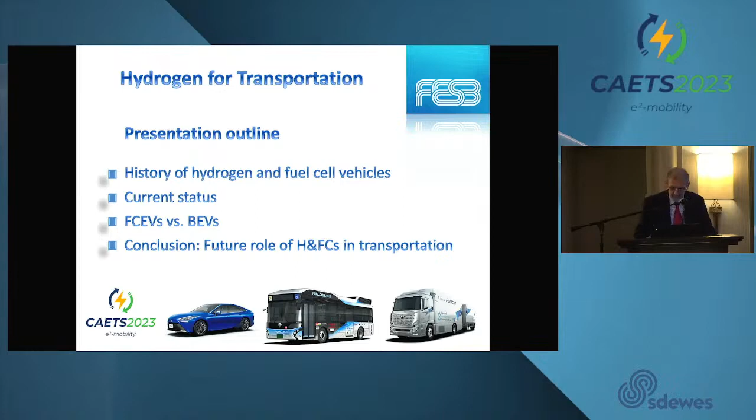I think it's very much clear that a hydrogen car is also an electric car. It has an electric motor, but the energy is stored in the form of hydrogen instead of batteries. But I should also mention that every fuel cell car actually also has batteries, so it's kind of a hybrid car as well.

We can also have hydrogen in internal combustion engines, but I think that's already passé, although recently there are some advancements in internal combustion engines. But the efficiency of fuel cell systems is higher than the efficiency of internal combustion engines. And efficiency should not be compared at maximum power, it should be compared at average power. There, the efficiency is about twice as much in fuel cell vehicles as in internal combustion engines.

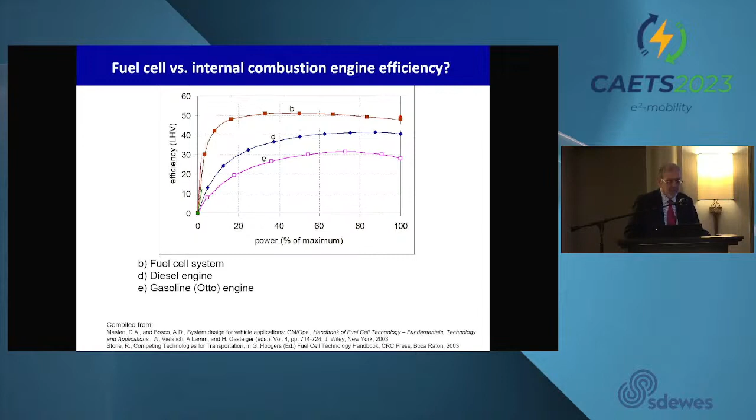So most of the recent developments are in fuel cell electric vehicles. Now going back to history, the first hydrogen car was developed in 1807, in France. This vehicle used the first internal combustion engine that used hydrogen as a fuel, and hydrogen was stored in a balloon. This vehicle is now in a museum.

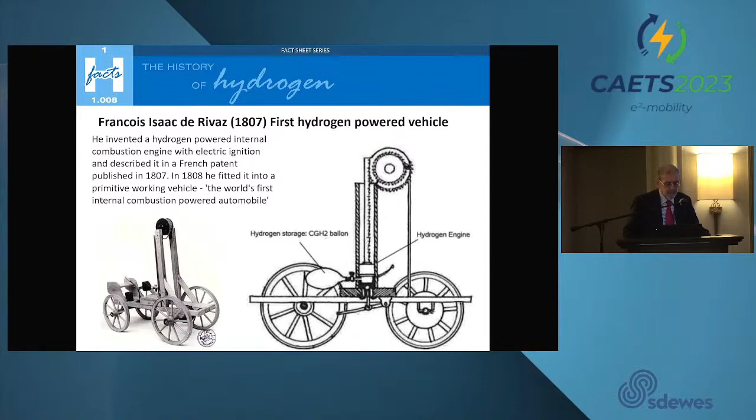And then a few decades later, fuel cells were invented. Actually, the Swiss-German scientist Christian Schönbein is the first one who realized the fuel cell effect, and he was in communication with Sir William Grove as well as with Faraday. Those letters are saved, and they prove that Schönbein is actually the one who first observed the effect of fuel cells, but Grove was the one who first made a working fuel cell and applied for a patent.

Then again, several decades later, we have a remarkable prophecy by Jules Verne, who made many predictions, and many of those predictions came true. This one, about hydrogen being a fuel of the future, or as he said, water being a fuel of the future with its constituents, hydrogen and oxygen, is also coming true.

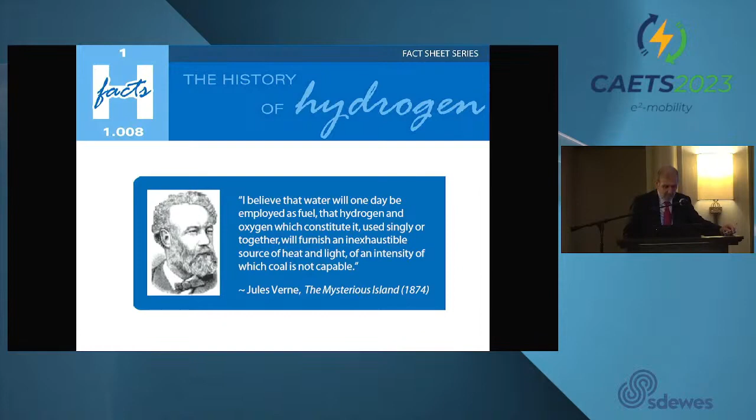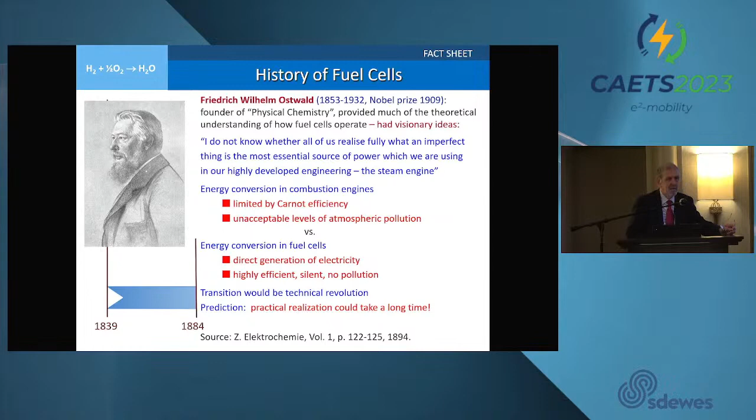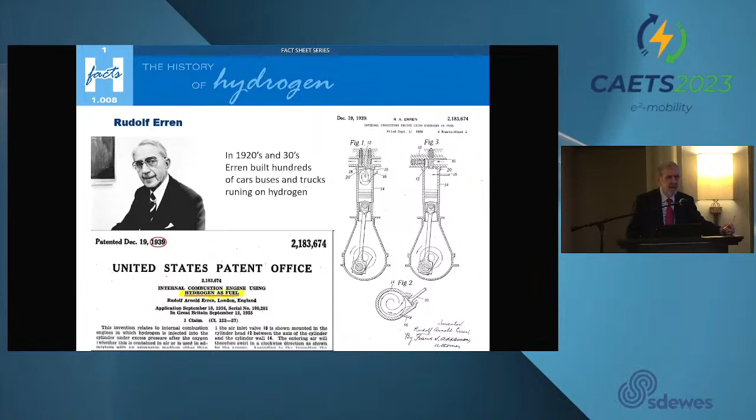Between the two World Wars, there was a lot of development of hydrogen vehicles by a German engineer, Rudolf Erren, who worked both in Germany and the UK, and also held some patents in the United States. He made hundreds of buses and trucks running on hydrogen using internal combustion engines.

Then in 1933, Norsk Hydro power company converted one of their small trucks to use a hydrogen engine, but the hydrogen was not stored on board. Instead, ammonia was stored on board, and there was a small ammonia cracker on board the vehicle.

About 100 years after fuel cells were discovered, we had the first practical fuel cell. It was by Francis Bacon in the UK, just before the Second World War. After the war, this technology was obtained by a US company and used in a space program. But this was the first fuel cell system.

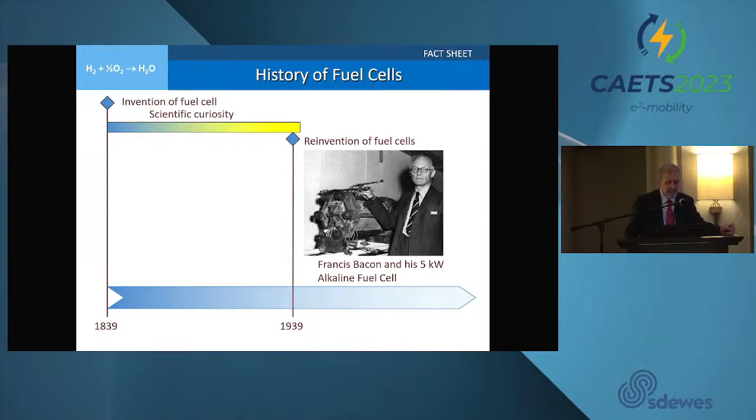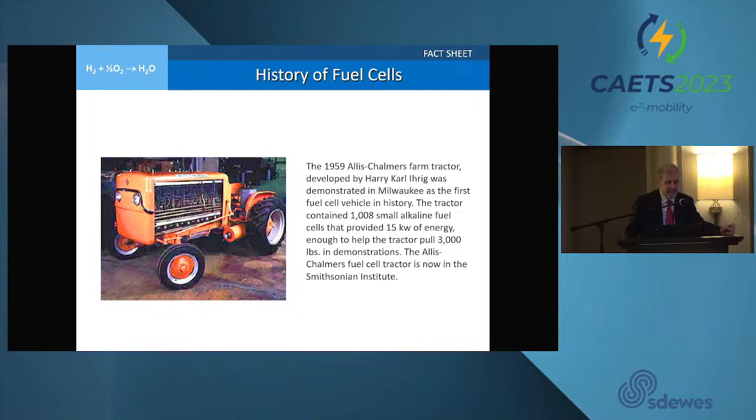Very soon after, we have the first fuel cell vehicle. It was Allis-Chalmers' farm tractor, developed in 1959. This tractor is now in the Smithsonian Institute.

Then we have the space program, where they used hydrogen not only as a fuel for propulsion but also in fuel cells, in both the Gemini and Apollo programs. Interestingly, in Gemini they used PEM fuel cells, which are now the predominant type. But at that time they were not very reliable, so they switched to the alkaline fuel cell based on Francis Bacon's invention, and used them in both Apollo and the Space Shuttle.

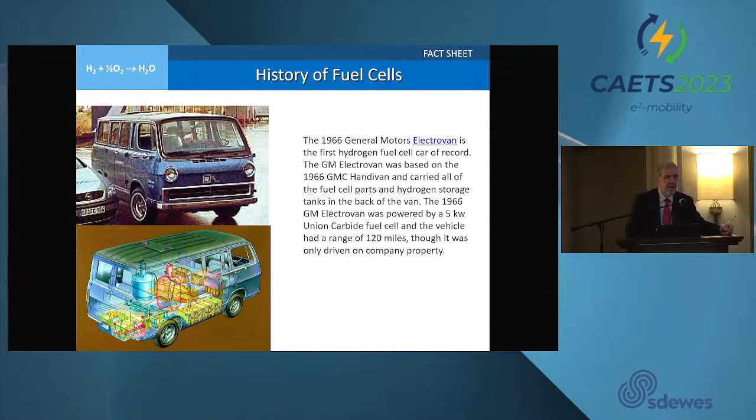That was actually the beginning of a new era in the development of fuel cells for practical Earth applications. First, in 1966, General Motors developed this van, which is considered the first fuel cell powered vehicle.

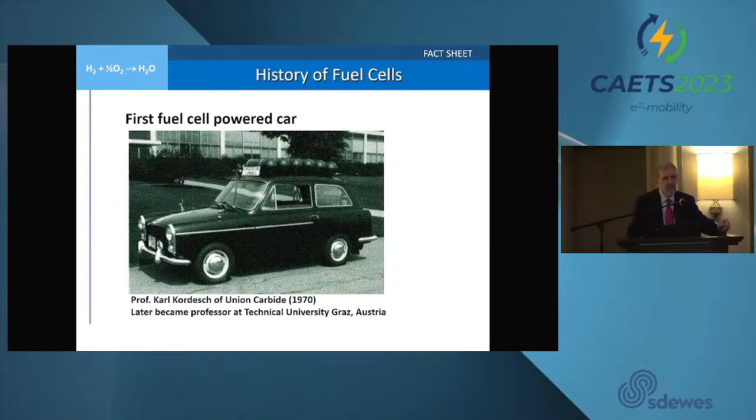Then Professor Karl Kordesch, who at that time worked for Union Carbide in the United States, converted this car. You can see the hydrogen tanks on the roof. It looks funny, but he used this car for 3 years for commuting to and from work in Boston. Later, he came back to Austria and was a professor at the Technical University of Graz.

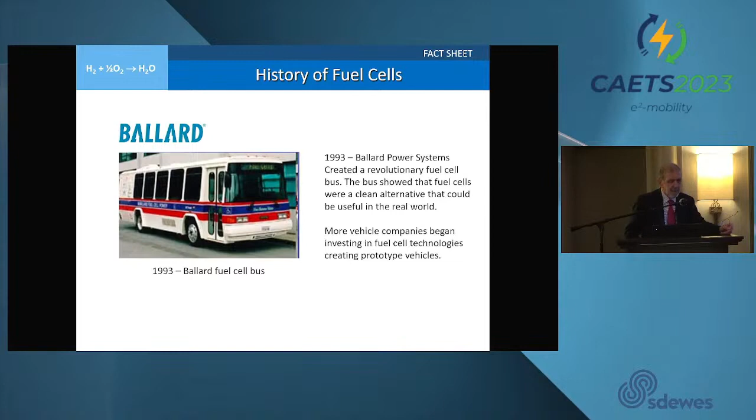In 1993, Ballard, which is now a well-known fuel cell company, created a fuel cell bus. Just about a month later, a company in Florida called Energy Partners made the first PEM fuel cell powered passenger car in the world.

I'm proud of this because I was part of the team that developed this car, and you can see me in the middle of this photo, the tall guy in the back with a mustache and black hair.

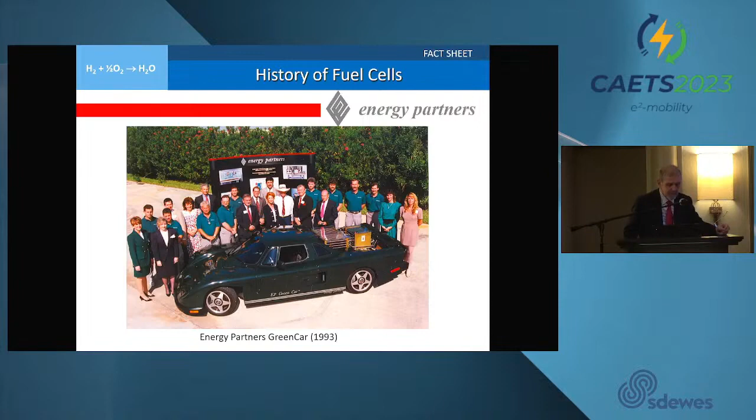By 2000, every car manufacturer had developed at least a prototype, and some of them even a fleet of vehicles.

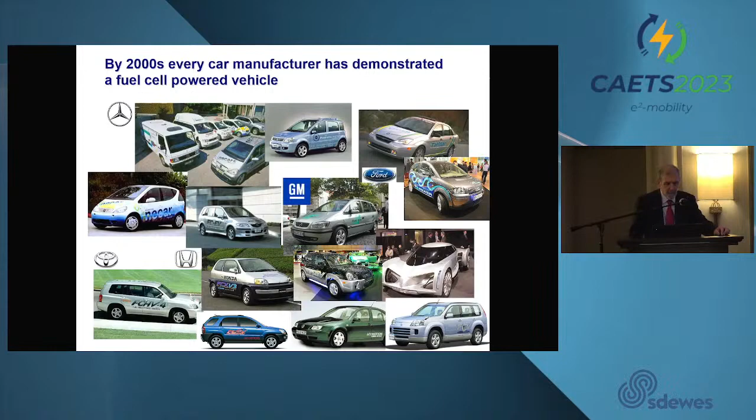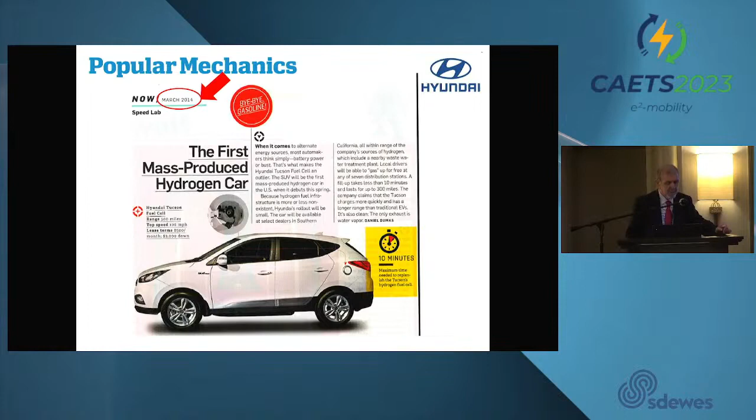Then in 2014, I was in a medical waiting room waiting for a doctor, and I was flipping through magazines. One of them was Popular Mechanics, and in it there was an advertisement for Hyundai. The title was the first mass-produced hydrogen car. So Hyundai actually started selling those cars in Korea.

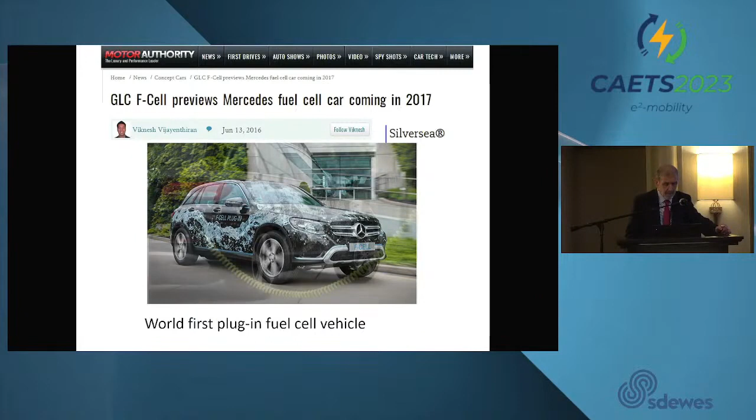Then in 2017, they came with the idea of a plug-in fuel cell vehicle, which does make sense, but they never actually realized this because in the meantime they changed the CEO and changed the policy and strategy. So the first commercial fuel cell car is the Toyota Mirai.

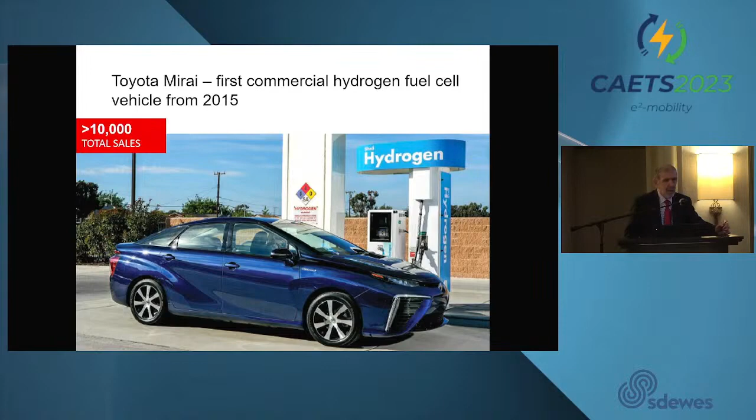Mirai in Japanese means 'the future.' So this is the car of the future that Toyota developed. Ankita will later show you more of this. This is the newest model of the Mirai.

They have a business model selling cars not only to individual customers but also to taxi fleets, for example in Paris and in The Hague. I had a chance to watch a video on YouTube about a taxi driver praising this car. He said it's much better than batteries, if nothing else, for very fast refueling. He said, 'I spend only 5 minutes to refuel my car and I'm back on the road with customers.'

The newest model is the Hyundai Nexo, which is also being sold in Korea, and later you will see that most fuel cell cars now in the world are sold in Korea.

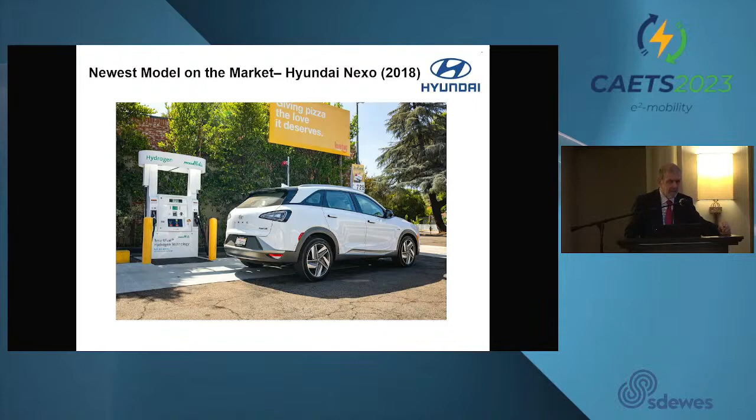This was taken from a magazine, the hydrogen cars in 2023. There are only 2 listed, so there are basically 2 car companies selling fuel cell cars. If you want to buy a fuel cell car, you only have 2 options: the Toyota Mirai and the Hyundai Nexo. The price is about $60,000, and they are even rated here on the right side.

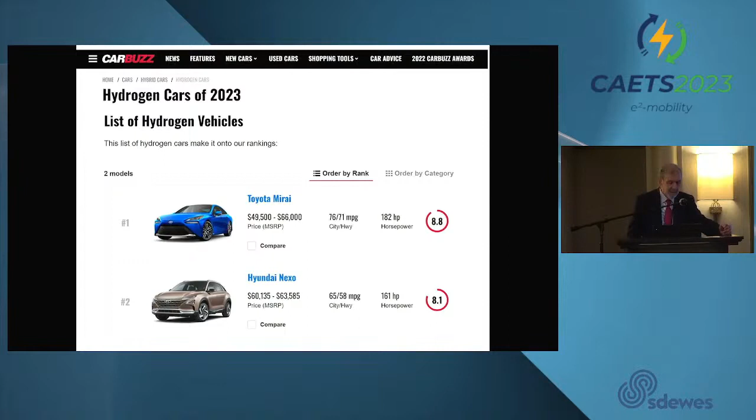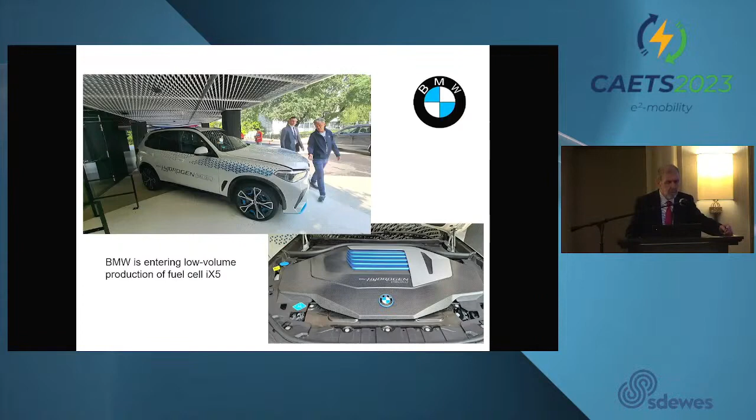Recently, earlier this year in May, we had a conference here in Zagreb organized by Ankita, and there was a BMW with a new car, iX5, and they are entering low volume production. I had the chance to drive this car. This brings us to a comparison between electric vehicles with fuel cells and those with batteries.

Yesterday we heard several times that battery cars are much more efficient than fuel cell cars, and therefore we should use electric cars with batteries, not cars with fuel cells. There's no question about it. The batteries, from well to wheels, are about 70 to 90% efficient. The fuel cell cars are about 30 to 40% efficient.

So there's about 2 to 3 times more efficiency if we use batteries instead of fuel cells. But efficiency is not the only criteria we should compare the cars on. There are many other things the final customer will actually decide on. For example, refueling time: the fuel cell car can be refilled in 3 to 5 minutes, while the battery car takes about an hour or more.

Then there's energy density in terms of size and weight. Hydrogen itself has about 40 kilowatt hours per kilogram, but the efficiency of the fuel cell is about 50%, so we get about 20 kilowatt hours per kilogram of electricity. If we include the tank itself, we come down to 0.7 to 0.9 kilowatt hours per kilogram, because in the hydrogen tank we only have a few percent of hydrogen by weight. And if we include the fuel cell itself, then it's about 0.4 to 0.6 in present systems. In present systems, the batteries are 0.1 to 0.26, the highest I've seen on the market.

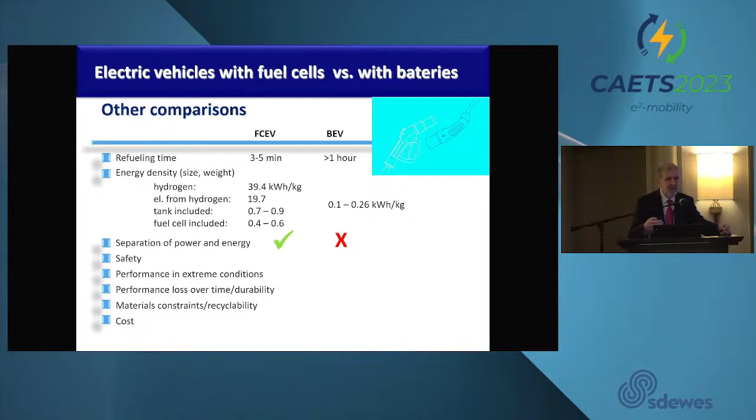There is performance in extreme conditions, extreme heat, extreme cold. There is also performance loss over time and durability of both fuel cells and batteries. And we heard yesterday about material constraints and recyclability, which applies to both fuel cells and batteries. But finally, the owner or potential customer will make his decision basically about cost - and that's lifetime cost, not just the purchase of a vehicle, but also lifetime operation and cost.

Automotive companies are making their plans for the future, and usually they make maps like this. I believe this is from General Motors about 10 years ago, and they believe that battery vehicles will be for small vehicles with a light load and short driving, but for longer driving and higher load, fuel cells become more and more interesting.

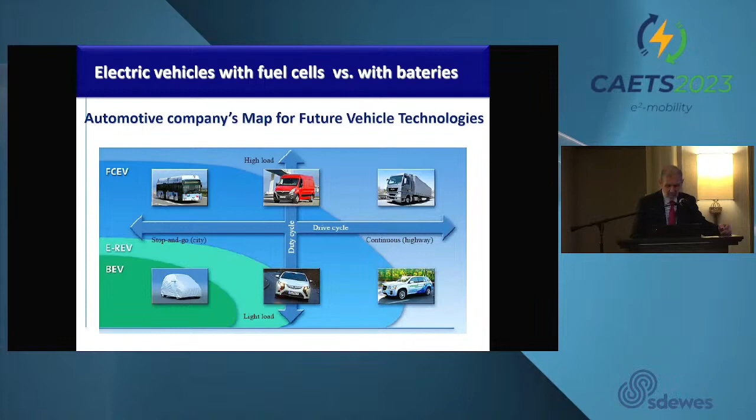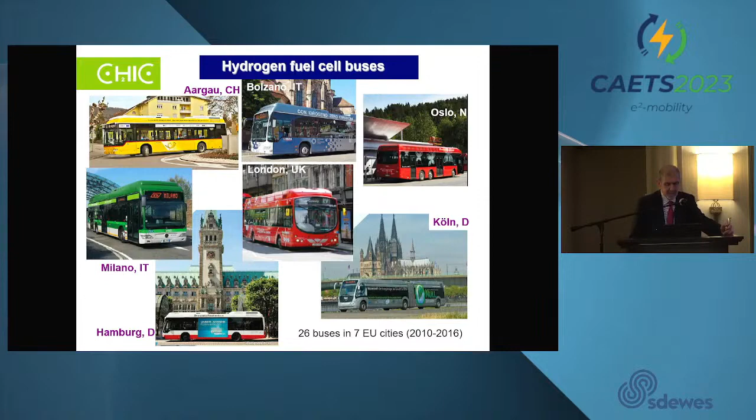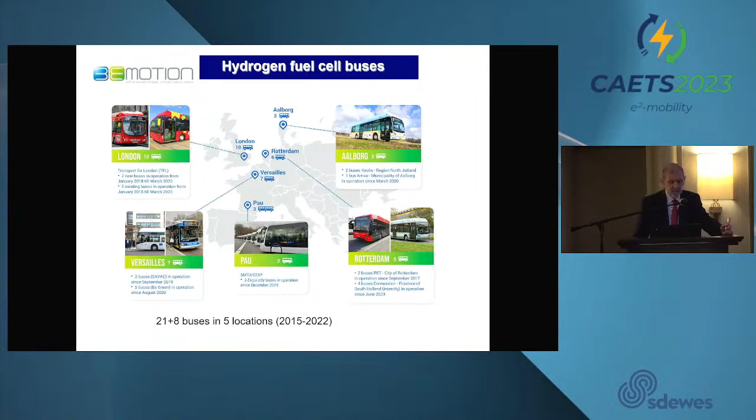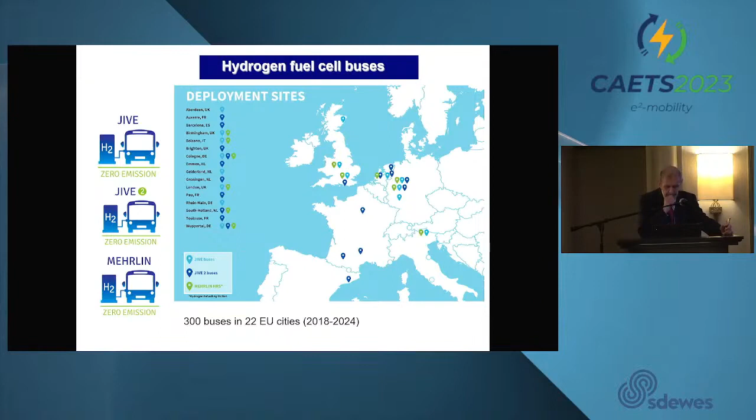Besides passenger vehicles, this becomes more attractive for buses. This is the CHIC program that ran between 2010 and 2016 in Europe, and there were also 10 buses in Canada. Overall, 26 buses were tested in 7 EU cities. This program was continued with 3Emotion, where another 29 buses were tested between 2015 and 2022. Then the program JIVE, JIVE 2, and MEHRLIN tested both the vehicles and the infrastructure. We had an opportunity to test one of those buses here in Zagreb.

In December, we had one Caetano bus that was used by ZET, the Zagreb Public Transit Authority, and it was tested on routes that are extremely difficult for batteries, for example going to Sljeme and back, and they were testing the hydrogen consumption. There was also a refueling station improvised in their facility in Podsused.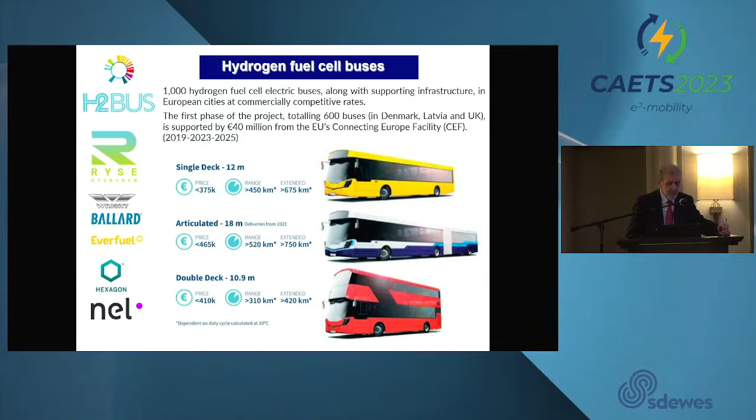And then there are plans for additional 1,000 hydrogen fuel cell buses along with the supporting infrastructure in European cities. These numbers are still not high as they should be, because China is producing 1,000 fuel cell buses a year, and we are talking about a 5-6 year program in Europe. So we are lagging behind.

I had a chance to work on one of these projects on a fuel cell bus. We were actually developing the fuel cell range extender to the battery electric bus. The company was VDL, the largest manufacturer of electric buses in Europe, and we quite successfully built this system. It was led by Bosch and ElringKlinger.

By the time we were making these pictures, I was strolling around their yard, and I noticed those trucks. Those were DAF, and they were hydrogen trucks. So the same team that was working on this project was also working on these trucks.

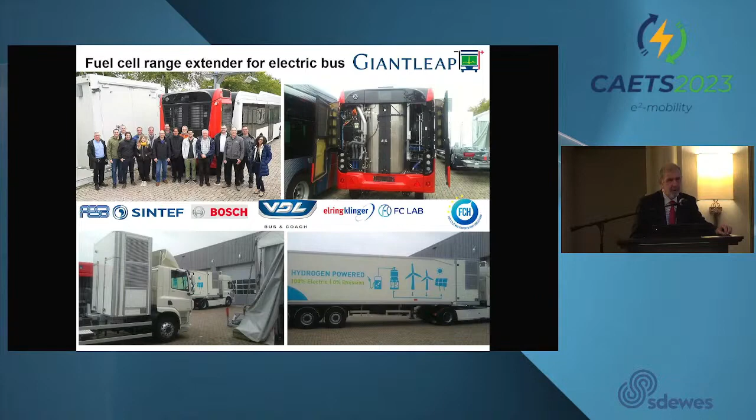Just last week, actually yesterday, I found this on the internet, that Nikola had a landmark launch of its hydrogen fuel cell trucks in North America. And it's not just the trucks, because you can build as many trucks as you want, but if there is no refueling infrastructure, that's useless.

So I know that Nikola was also working with my ex-company, Proton Onsite, which has been bought by Nel, now on establishing at least 200 refueling stations along the United States.

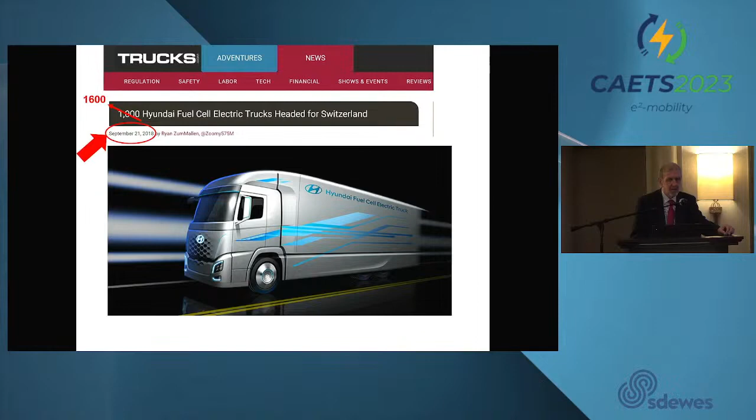Hyundai also came with a fuel cell truck, claiming they have a customer in Switzerland who ordered 1,600 trucks. A similar announcement came from a company called Hyzon. When I checked this, those are mainly ex-General Motors engineers. They have an order of 1,500 hydrogen fuel cell trucks in New Zealand.

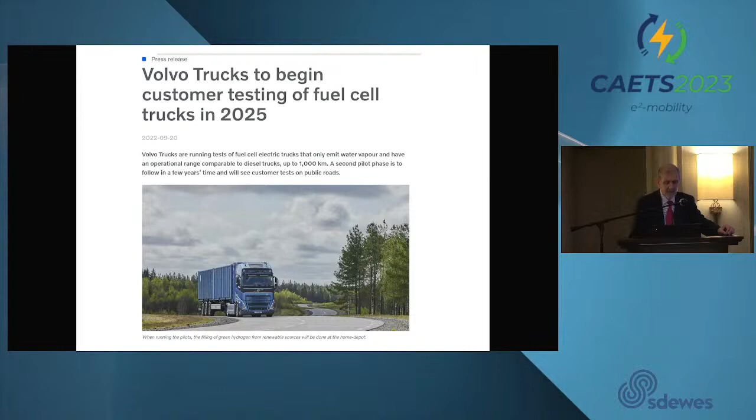No wonder the trucks are actually more successful, because this study performed for the Clean Hydrogen Partnership showed that hydrogen trucks, those with the blue lines here, are very much cost competitive, cost meaning the total cost of ownership, with other technologies, and also very close to existing diesel buses. And in 2027 and 2030, they are even the least expensive option.

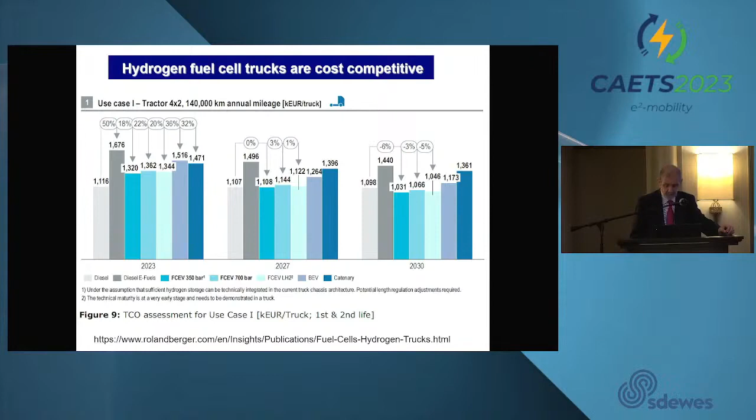So to summarize the latest news on hydrogen vehicles, you can find any information on Google and the internet today. The number of fuel cell vehicles in the world increased by 40% only in 2022, totaling 72,000 vehicles. About 20,000 vehicles were sold in 2022, and only 15,000 of them were cars, and two-thirds of these cars were sold in South Korea. About 80% of the global stock are cars, with 10% being trucks and almost 10% buses.

The fuel cell truck segment grew at a faster rate than cars and buses, increasing by 60%. What is interesting, China is home to more than 90% of the world's hydrogen trucks and almost 85% of the global fuel cell bus fleet. And there are about 1,000 hydrogen refueling stations in operation around the world, and about 200 in Europe.

Hydrogen is also very interesting for trains. There is an Alstom train that is running in northern Germany. It's actually in service already, and Siemens is also developing, excuse me, a hydrogen train.

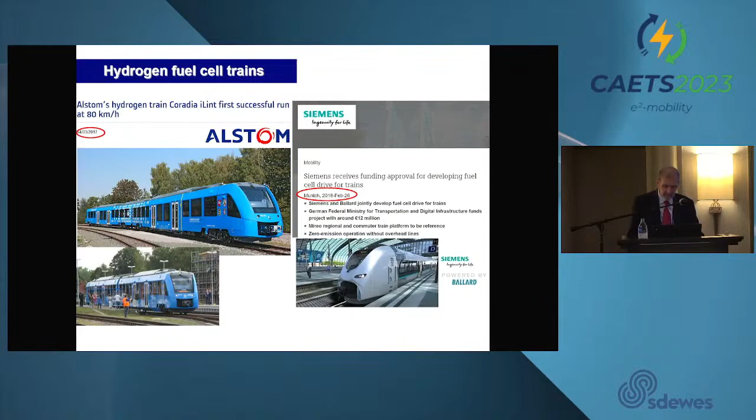And this is a map of how many are there in Europe. I said about 200 so far.

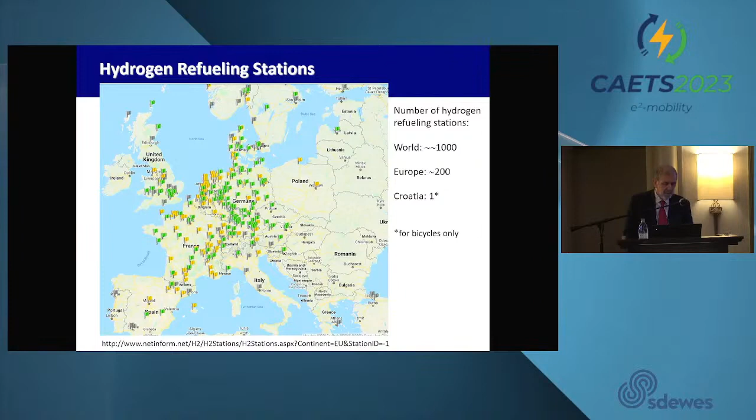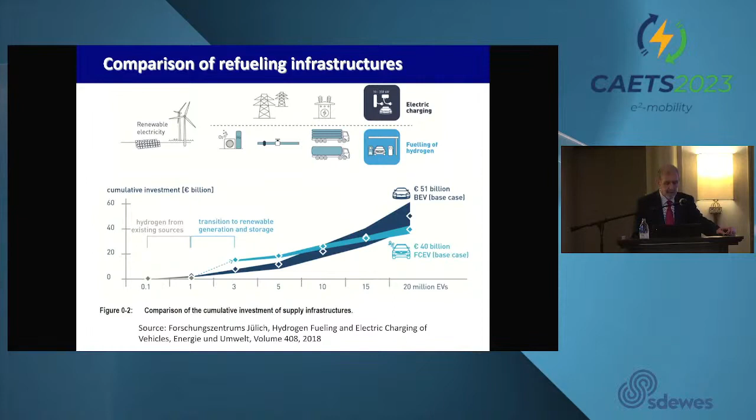That brings me to the study performed by Jülich Research Center in Germany that compared the infrastructure of batteries and the infrastructure for refilling hydrogen. The conclusions show in this picture below that for low volume, the battery infrastructure is cheaper because it relies on existing power plants and existing lines. But in the future, for the same amount of vehicles on the road, the fuel cell infrastructure may actually become even cheaper. Here are some of the conclusions of this study.

For low market penetration levels, a few hundred thousand vehicles, the cost of infrastructure is essentially the same for both technologies. Hydrogen infrastructure is found to be more expensive during the transition period, but for high market penetration up to 20 million vehicles, a battery charging infrastructure would be more costly than a hydrogen infrastructure. The mobility costs per kilometer are roughly the same in the high market penetration scenario.

For the scenario with 20 million fuel cell vehicles, approximately 87 terawatt hours of surplus electricity for electrolysis - and the emphasis here is on surplus - plus 6 terawatt hours of grid electricity for transportation are required. On the other hand, charging 20 million battery electric vehicles accounts for an electricity demand of approximately 46 terawatt hours out of the distribution grid.

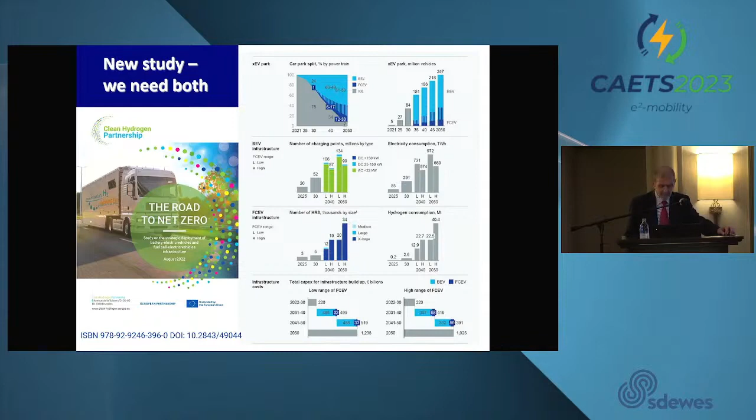So coming to conclusions, there are issues with hydrogen for transportation. First of all is competition with batteries. But for me, actually, there is no competition - there should be market sharing. Different market segments can be covered by batteries, and different market segments can be covered by hydrogen vehicles, because hydrogen fuel cell electric vehicles have three major advantages that I already mentioned: separation of power and energy, gravimetric specific energy, and fast fueling.

Also, another issue preventing large-scale hydrogen deployment is hydrogen production from excess renewables. Hydrogen makes sense if it's produced from excess electricity. We heard yesterday there will be a lot of excess electricity once we go to 100% renewable energy systems - we will need 2 or 3 times more installed power than what we actually need to satisfy just the power requirements, and that excess should be used to produce hydrogen, and that excess, of course, will have a very low price. So that will also reduce the price of hydrogen, because right now hydrogen is relatively expensive.

And of course, there is not enough infrastructure, because we still have a chicken and egg problem. Nobody wants to build a hydrogen refueling station, because in order to be commercial, they need at least 200 vehicles on a daily basis to fill hydrogen there. And nobody's going to buy a hydrogen car because there is no hydrogen infrastructure around.

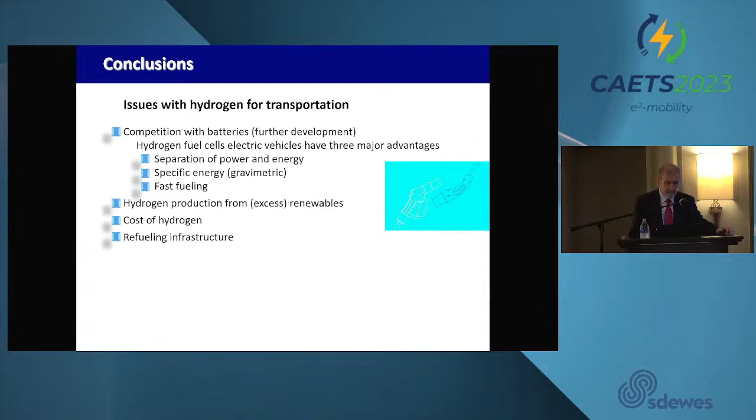And then at the end, I promise I will attempt to predict where hydrogen and fuel cells offer sufficient advantage to make a significant contribution to decarbonization of transport. However, I have a warning here, because predicting the future is a risky business. This is how in 1954 scientists from the RAND Corporation envisioned the home computer would look like in 2004, and we can now all laugh.

So I don't want people 50 years later laughing at me and saying, Professor Barbir said in 50 years we will drive hydrogen cars such and such. There are also some other remarkable prophecies by experts at that time. The IBM chairman said he thinks there is a market for maybe 5 computers in the world. And the president of Digital Equipment Corporation said in 1977 that there is no reason why anyone would want to have a home computer. They couldn't be more wrong.

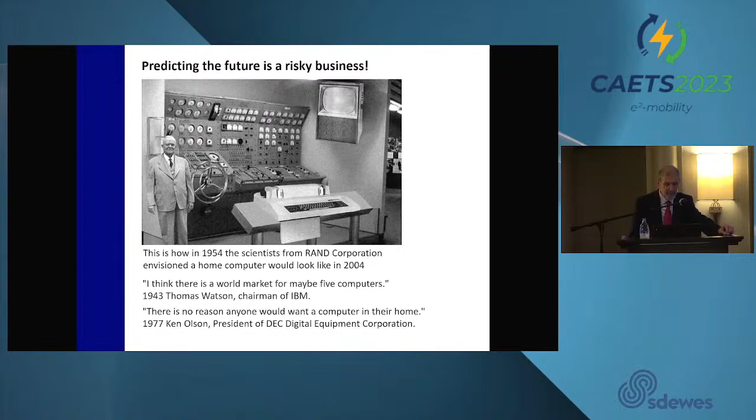So I hope with my prediction I will not be that wrong. My prediction is that for cars, hydrogen will be used only for those customers that find fast fueling important. Buses depend on the route configuration, available time for refueling, and recharging.

For example, the route that goes uphill, hydrogen is probably better than batteries, because the batteries will be empty by the time the bus reaches the top of the hill. Similar goes with trucks, depending on the route length, configuration, and available time for charging or refueling. Trains, probably for regional trains on longer non-electrified routes, as I already explained.

I didn't touch ships and ferries, and I believe my colleague Rodolfo Taccani will talk a little bit about ships and ferries, but only for shorter routes. For longer routes, probably ammonia or some other e-fuels will be better.

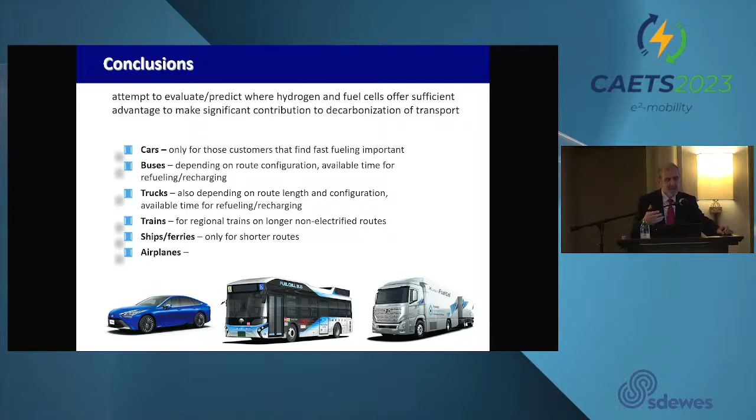And for airplanes, there is still discussion. There are studies from back in the 90s, and a recent one by Airbus, and before that by Boeing. Hydrogen is the lightest fuel of all, three times lighter than other fuels, so that's very alluring for aircraft. But hydrogen tanks are heavier, so at the end, hydrogen may be heavier than other fuels overall, but it certainly is a very attractive fuel for airplanes.

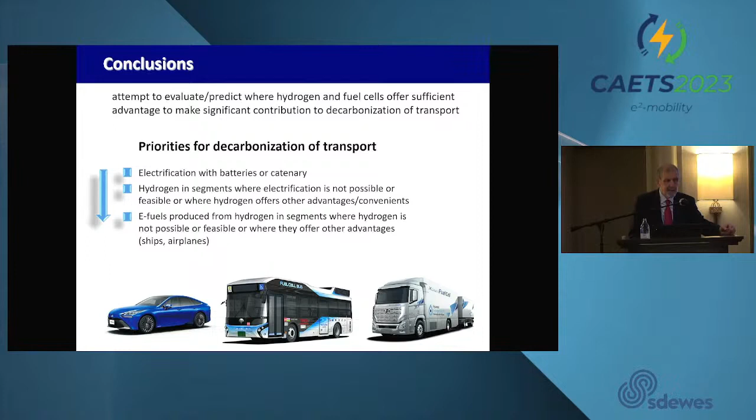So, my prediction is that the priorities for decarbonization of transport should be: first, electrification with batteries or catenary. Hydrogen will be used in segments where electrification is not possible or feasible, or where hydrogen offers some other advantages or convenience. And at the end, e-fuels produced from hydrogen, because don't forget, e-fuels are produced from hydrogen. So if you use the argument that hydrogen vehicles are less efficient than battery vehicles, then we should also use the argument that e-fuels are less efficient than hydrogen, because e-fuels are produced from hydrogen. But there are still segments where hydrogen is not possible or feasible, and where e-fuels may offer other advantages, such as in ships and airplanes.

And with that, I would like to draw your attention to my recent book, which I just got a copy of before coming here to Zagreb. It's called Fuel Cells for Transportation, exactly as the title of my presentation here today. Thank you very much.

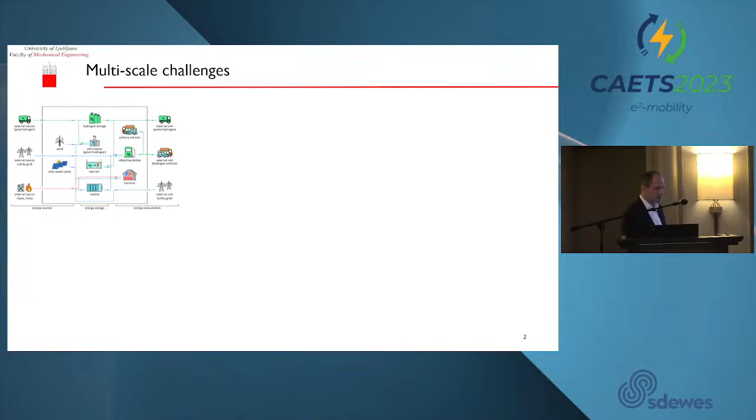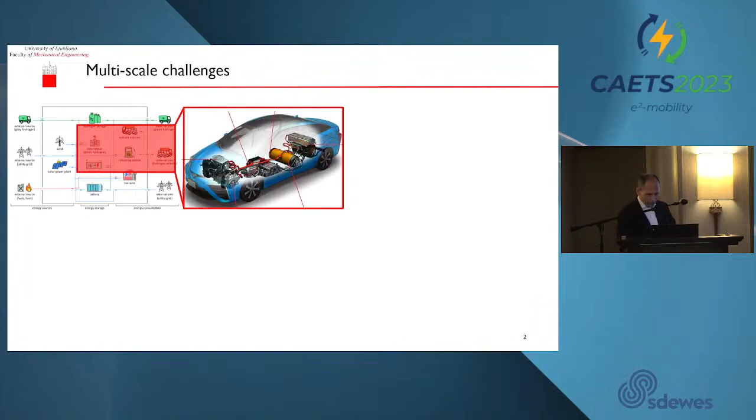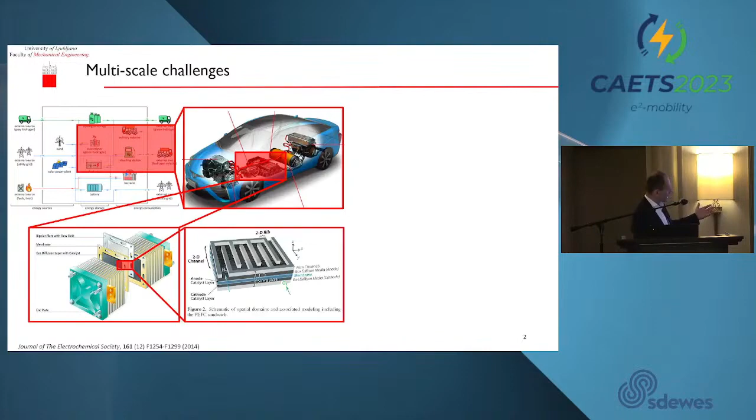Let's look now at such a renewable energy system. We can see here fuel cells, electrolyzers — I will today talk about fuel cells, but the same is valid for electrolyzers. If we go further, we can see electric vehicles connected to it, fuel cell electric vehicles. If we dig into the fuel cell electric vehicle, we see the fuel cell stack. In a fuel cell stack, we see a fuel cell single cell with channels. Here you see the membrane electrode assembly. And if you go deeper in, you then see membrane catalysts, and already here we are on micro or nanometer scale. The fuel cell works only if all these processes and all these scales work properly.

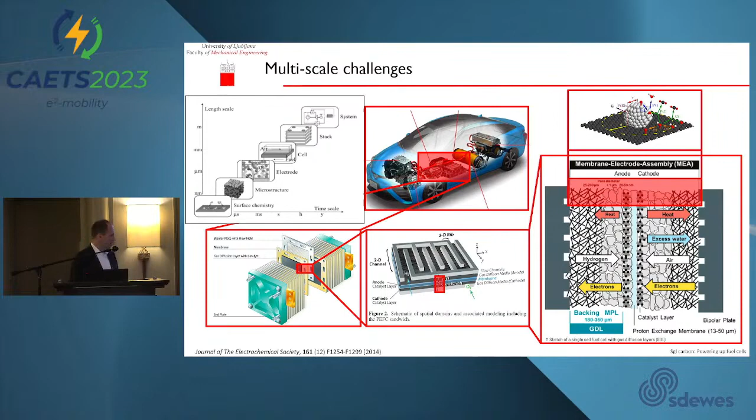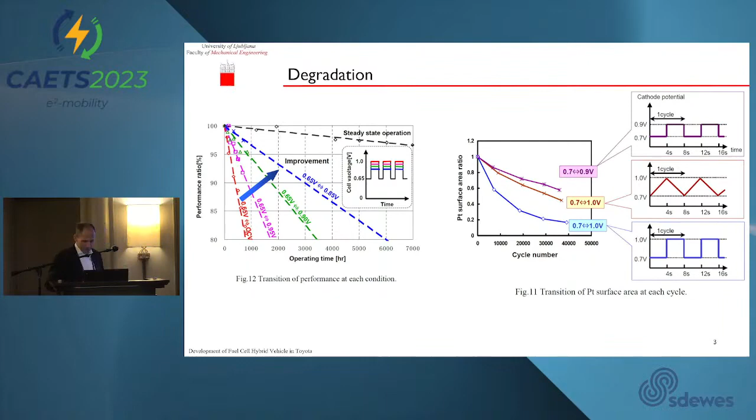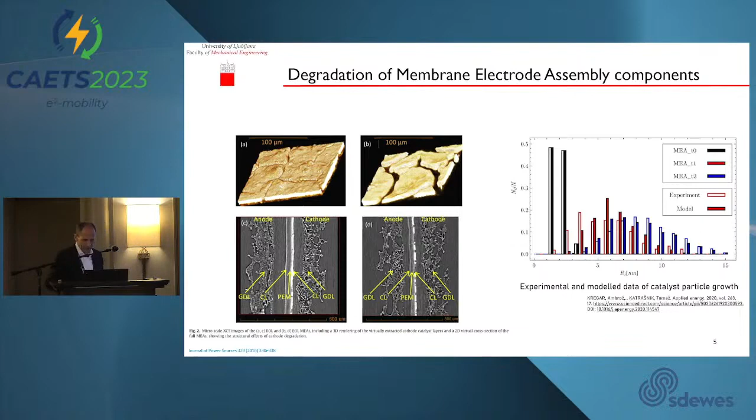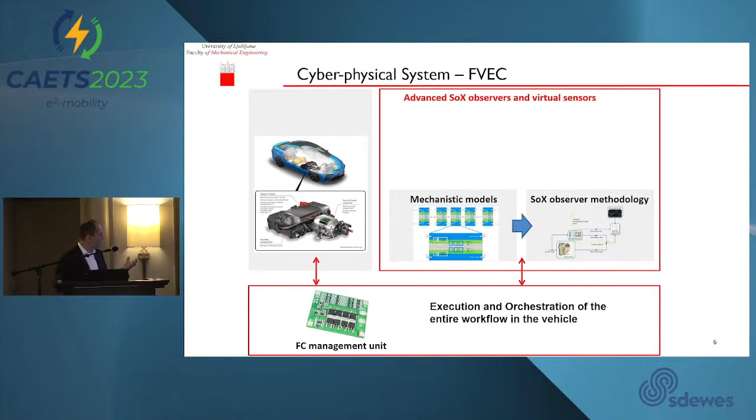And here are these advanced observers and virtual sensors. Why are they important? Because we cannot install all physical sensors, but we still want to see inside the fuel cell. And what we need for this, we need physics-based or mechanistic models, we need some observer frameworks, and we need then parameterization tools. We have to identify if we have well parameterized it, and we have some model-based DOEs so that we can really look competently into it.

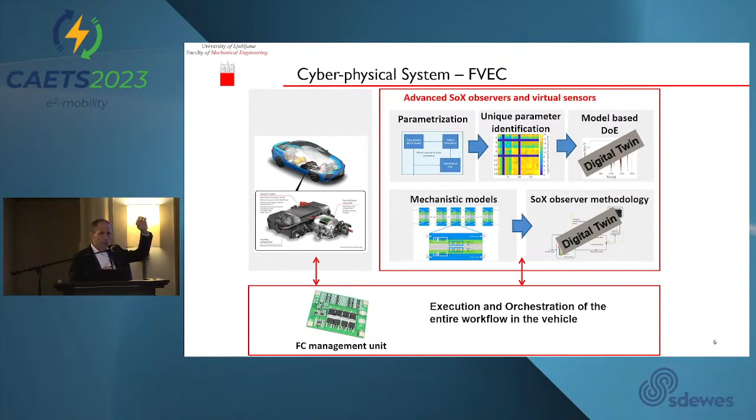And yes, all of a sudden we are then talking kind of digital twins which will run with us. Some of them will be on a car, some of them will be on a cloud. So this is still currently under development.

And let's say how it will look like at the end is that we will have a real unit under test. We will have some inputs, and in parallel, models will run, which will compare outputs of the real system to outputs of the model. And with this, then we can do a lot of identification and see what's happening.

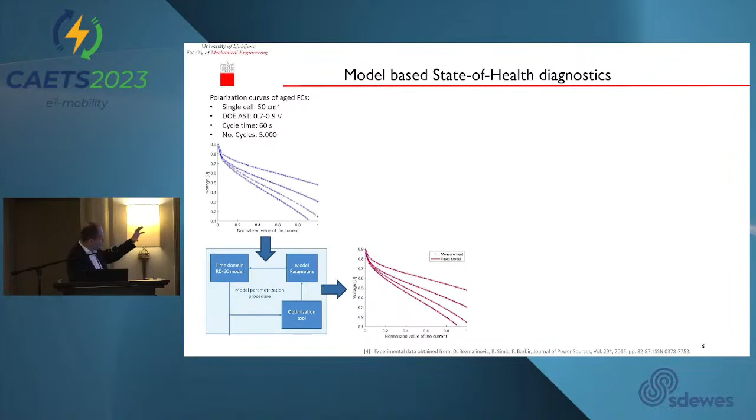Then we put a model on it, we parameterize it, and then all of a sudden we can look inside the fuel cell. You see, we can see how much the intrinsic exchange current density has changed, how much ohmic resistivity, how much diffusivity. So this gives us the quality of the catalyst. This gives us information on the membrane. This gives us information on the GDLs.

And yes, we have also validated this, and you see the model prediction coincides well with what was then experimentally measured. And here, the main message is that advanced model-based control, monitoring, and in particular diagnostics, which is not yet developed very well, is key to ensure high efficiency and durability of electrochemical devices, fuel cells, electrolyzers, but the same is also valid for batteries. So for greening, we also need a lot of digitalization.

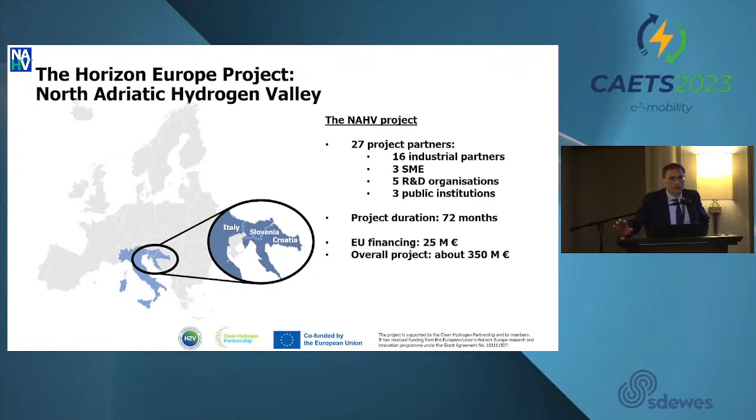So we now have a Horizon Europe project running with the same name, North Adriatic Hydrogen Valley, that encompasses 27 partners, 5 research institutions, and 3 public institutions. And the overall value of the project is about 350 million euros.

As I said, a hydrogen valley regards all the value chain of green hydrogen, starting from green hydrogen production, for example from photovoltaic, from wind turbine, then transformation of green electricity to green hydrogen, and utilization. This is an important aspect of a hydrogen valley. So utilization is not only for mobility, but also for industrial processes, for the so-called hard-to-abate sectors, such as steel industry, cement industry, glass industry. And then we have heat and power application, and mobility.

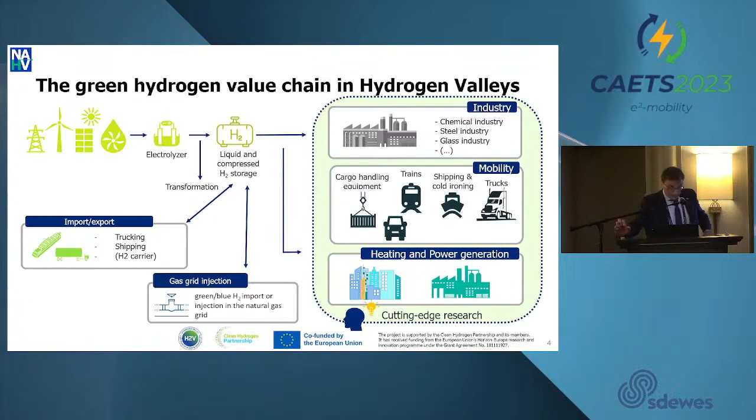Mobility, but as Professor Barbier said, where fuel cell and hydrogen find a better way of utilization, it is probably the so-called energy-intensive mobility, such as trucks, as we saw before, and shipping, propulsion of ships. This is what I will address a little bit more later.

Just to say that this North Adriatic Hydrogen Valley was quite a long process to establish this ecosystem, because it was recognized by the public institution. And it was, in my opinion, a perfect example of transnational collaboration.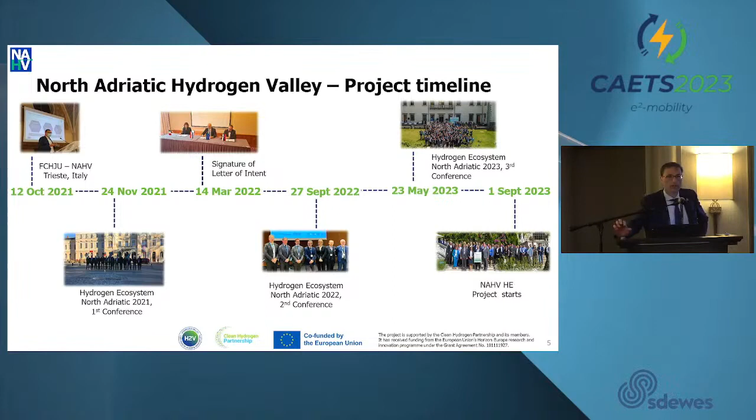The way of transportation of hydrogen will be mainly compressed gas, but it will also be studied the possibility to transport the hydrogen in liquid form and through a pipeline. But what I want to point out is that our territories are on the sea, so shipping is one key aspect in Italy and in Croatia. Therefore, part of the project, and here is the list of the pilot projects that will be activated in this Horizon Europe project, regards also shipping, propulsion of ships with hydrogen and fuel cell.

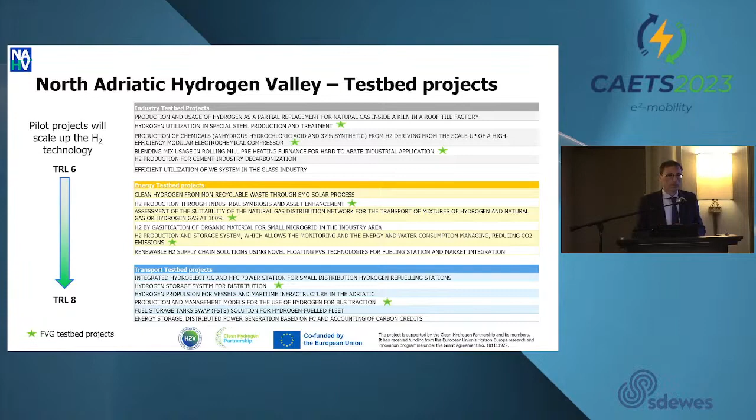One of the projects that will start first will be a green hydrogen production plant in the port of Trieste. Again, the application of hydrogen for green shipping is coming out. It will be a 2.5 megawatt electrolyzer, and the electricity will come using a photovoltaic plant with a peak power of 4.5 megawatt. Also part of the waste treatment plant electricity, coming from burning, from oxidizing the waste of the town, will be used to produce hydrogen.

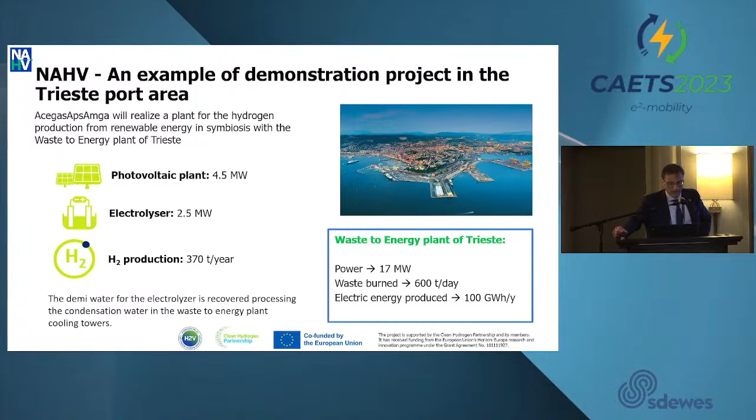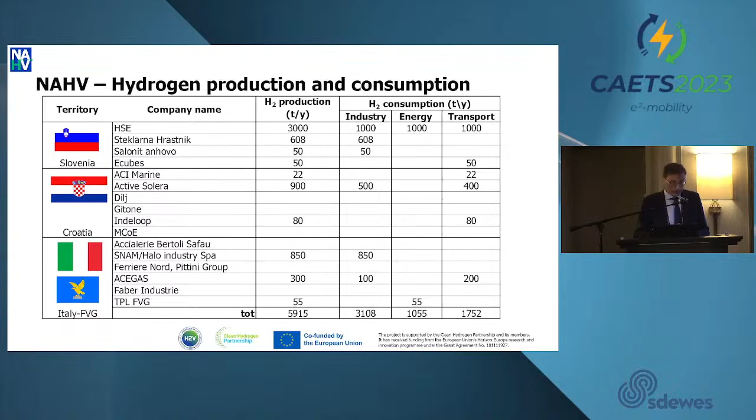As you see here, this Hydrogen Valley project regards the utilization of green hydrogen for industry, for the hard-to-abate sector, but also for transportation, and in particular, as I said, for high energy-intensive transportation, such as trucks and shipping.

Why shipping? Because shipping produces about 3% of total greenhouse gases overall. So it's not a big amount, but it's very concentrated in coastal areas and in particular in ports. You can imagine a big ship entering the port of Dubrovnik, for example, or the port of Trieste, has an installed power of tens of megawatts, so it pollutes as much as 1,000 cars.

So the idea, and here I am presenting just as an example some of the projects that the Friuli Venezia Giulia side is carrying on, utilization of hydrogen in shipping. So if we can decarbonize shipping, we can actually improve the quality of the coastal area.

But as we saw earlier in the presentation by Professor Barbier, the internal combustion engine has a low efficiency for small installed power, for part load operation, but in the case of a ship, an internal combustion engine of bigger power output can have an efficiency up to 50%.

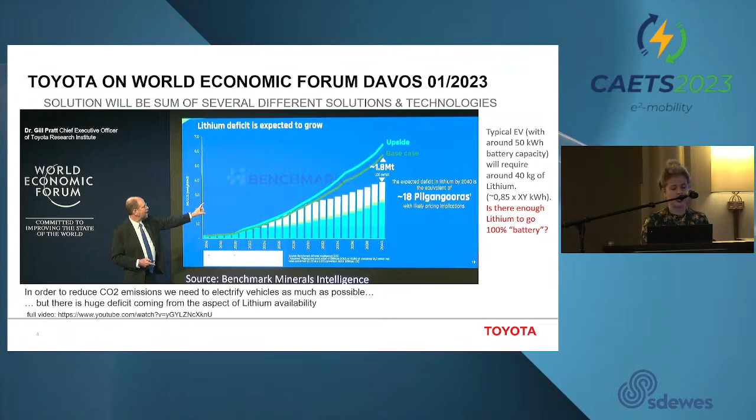Well, Toyota gives a huge effort to the decarbonization of transport, not just in their own company producing vehicles, but also in producing fuel cells in collaboration with other companies for trucks and for backup systems at some large data centers. So Toyota started very early.

We have their work dating back from 1992, where Toyota started to work on fuel cells and this technology. And today we already have a second generation of Toyota Mirai.

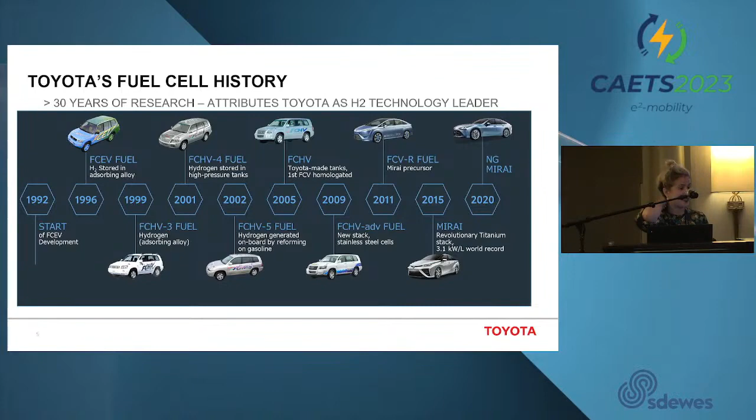And here in Croatia, we had a great opportunity to host the first generation during our Croatia Mirai Challenge, the road trip from Zagreb to Brussels. And also last year in November and December, we had the opportunity to host Toyota Generation 2 and also the Caetano bus, where Toyota worked with Caetano in developing this bus.

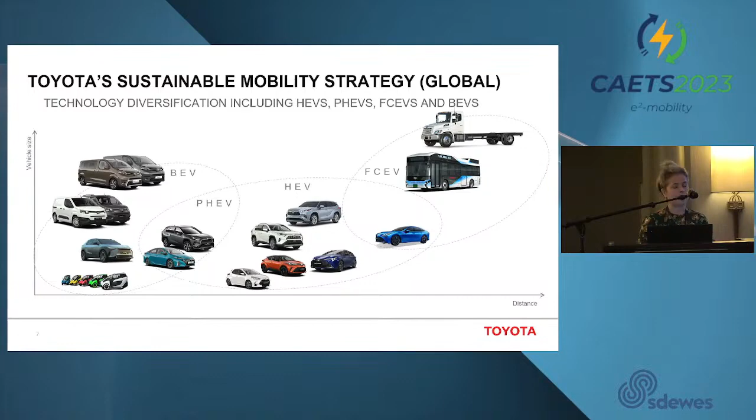Toyota has a multi-tech approach. Their opinion is that there is not only one solution. As I already said, we have to take everything good that we have on the market and use it for higher goals. So they have fuel cell electric vehicles, hybrid electric, plug-in hybrid electric, and also battery electric. As we already saw in this sketch, Toyota's Sustainable Mobility Strategy is developed globally, and depending on the state and its requirements, they offer the solutions that the market requires.

They are very much focused on building a hydrogen society. That is our common global goal. There is often a dilemma in discussions about what was the first hydrogen vehicle, or what to build first, the hydrogen vehicle or the hydrogen infrastructure. These two technologies have to go together. So by involving hydrogen vehicles, we in parallel have to work on introduction and installation of hydrogen infrastructure to supply existing vehicles, personal vehicles, trucks, trains, or whatever we have. So we have to advance all of these technologies together so we can put everything on the market.

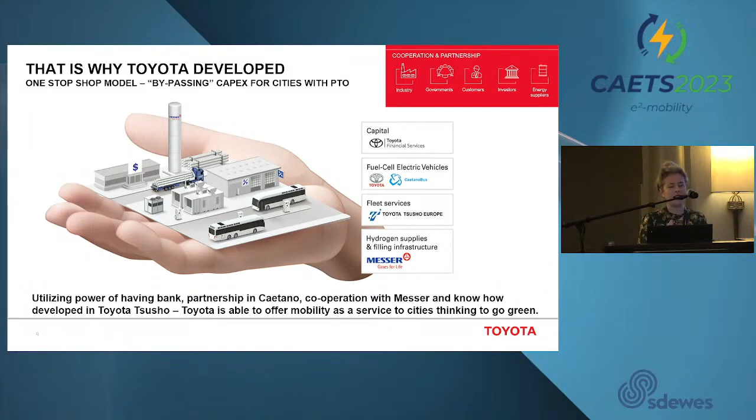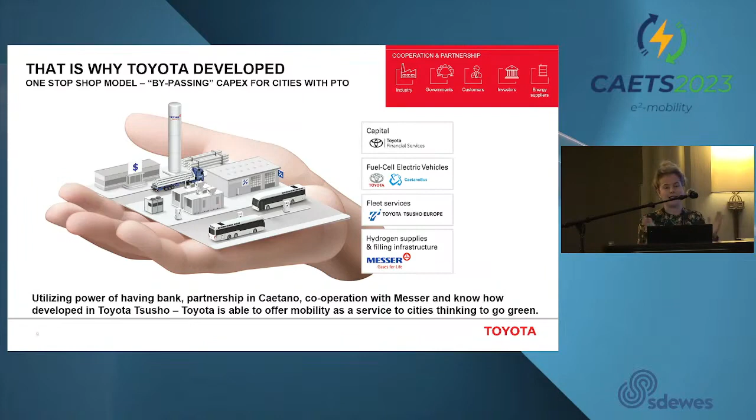That is why Toyota developed a one-stop shop model, bypassing capex for cities. They are collaborating with numbers of partners on different stages, so it's not just the point to buy and pay for the vehicle, but there is a whole strategy and technology and a lot of work behind it.

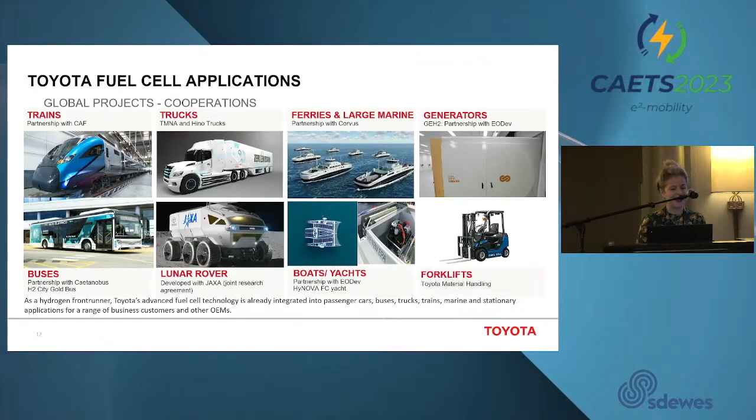Public transport is a hot topic, and many cities are working on introduction of hydrogen fuel cell buses. Today we have cities that already have hydrogen buses in commercial use, and numbers of them are promoting clean transportation based on hydrogen. Toyota is part of this project in different cities across Europe, and Zagreb had the opportunity to host a hydrogen bus in November, December last year.

We had the opportunity to be part of this unique project across Europe, and to test hydrogen buses in our environment. We also went to Sljeme, and it was amazing. It was snowing, and I think the best photos within this project, Jive 1 and Jive 2, were sent from Zagreb because of the atmosphere. You have snow, and you have a fuel cell bus, and you really feel that you are doing a good thing, part of transportation, but without pollution. You feel at peace - I'm clean, my environment is clean. I think it's a really good feeling.

Thank you very much.